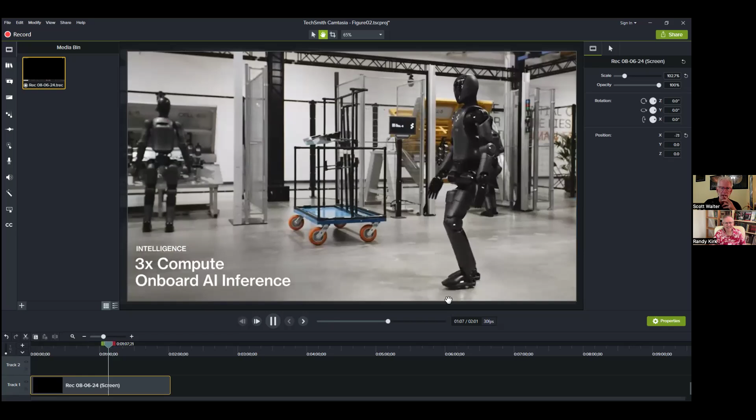But we're seeing a little bit more - we can see the camera suite that's in the back, and a funny kind of Cyclops head that's able to move with 2 degrees of freedom there, and also a change of shoulder design. This reveals some things we didn't see in the teaser video, but there's also a lot of other things in the teaser video not being shown here that we'll talk about. The first thing was like, okay, let's start counting robots, get an idea of how many are there. And when you're done, you end up counting 5.

So I guess the next time someone says a small fleet of robots, that's what they mean by that - means 5, I guess. I was trying to figure out what's a fleet, and the definition is anywhere greater than 1 up to 100 or something, like a naval fleet or a fleet of cars.

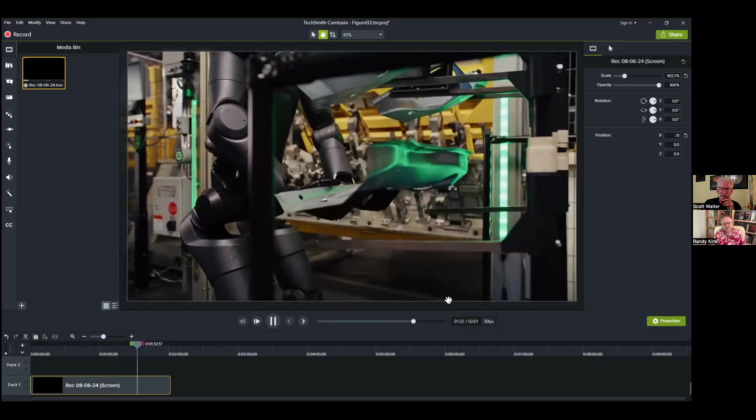And so here we see it actually in the production line, and I'll go through this in excruciating detail, but overall showing what I've always referred to as the low-hanging fruit in the automotive plants - there's plenty of example stations like this. Actually, up to this point, I'm very disappointed we haven't seen this from Tesla yet. We see them packing the batteries in, but I'm expecting them to show this because there's so many stations like this, and it is so easy. Aren't they showing that? It can be done, but there's still some aspects to it that will be a bit tricky.

Okay, so what were your thoughts at the beginning? Everyone says that the first 10, 20 seconds here is very similar, no doubt about it. Maybe it's just intentional to provoke a bit. But then as you start going around here, they're just giving you the view of the body and some of the changes that have been done. We can see that they really changed the hip area quite a bit.

So your primary actuator, the one that goes right through here, is the most important one - that's the one that gets you to walk. Now the question is whether they've spec'd it to have high enough torque to get the walking speed you want out of it. But I would definitely make that the primary actuator, and all the others would be a little bit later down the line. Now, we did get a breakdown in some of the quotes of some things that may not be obvious right here.

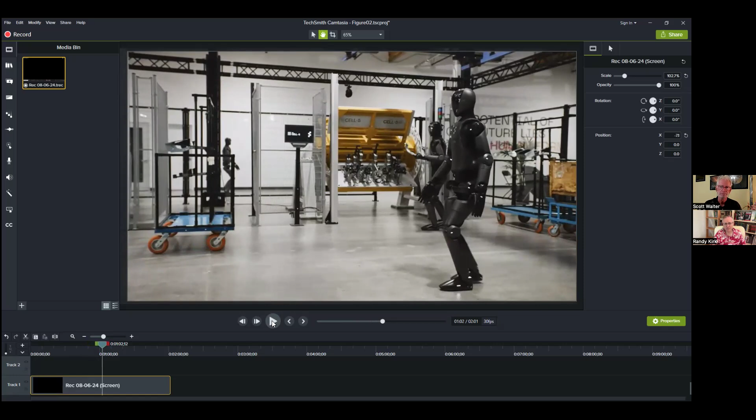But all right, what's going on here? What do you see, Randy? Well, everybody wants to see about the walk, how fast is it walking, how clever, does it look human-like, does it look steady, sturdy, does it look like it's confident? And to me, my first thought when I saw it, it looks like all the rest.

So I'd say one of the first things is it seems to be plodding, so it's not getting any heel to toe here. So it still seems a bit mechanical and stiff. It's a bit more upright than Figure One, but Figure One was very slow. This one is just slow.

Okay, so they may have doubled the speed, because I tried to do a calculation on Figure One, and it was really shuffling very slowly, maybe about half a mile an hour, a little bit faster, definitely under a mile per hour. This one is probably, counting steps and looking at the time, assuming anywhere from 10 inches to 12 inches per step—it's hard to estimate here—this is over a mile per hour. And it's about the same as what the Tesla bot's doing.

So the Tesla bot is also not fast. I've been pretty vocal on Twitter about this. I think they're both too slow for me, so they need the next version. Even the Gen 2 Tesla bot is very slow. It needs to double its speed. 1.3 miles per hour just will not cut it. You've got to be at least 2.6—that's the standard walking speed assumed for humans in the factory. And you can't get just another 30% boost, you've got to double it.

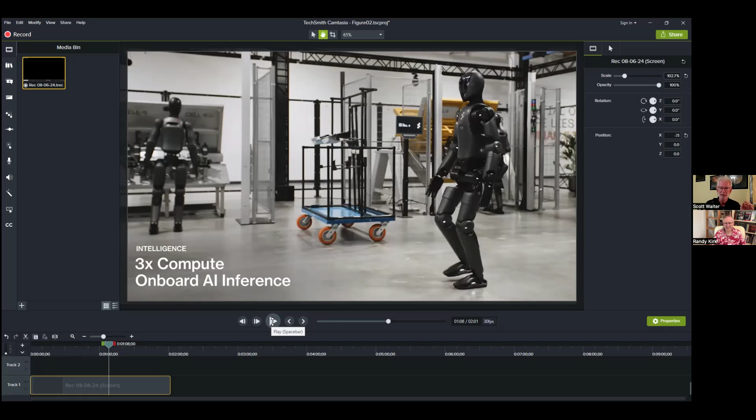Okay, so now do they have a pathway here to be able to double themselves? If you put this side by side, looking at the Tesla bot, it seems a lot smoother and a bit more graceful going through. You're seeing the heel to toe there, and over there you're seeing a little bit more in that. And so that might be one of the things they have to start working on themselves over time, depending upon how they do it.

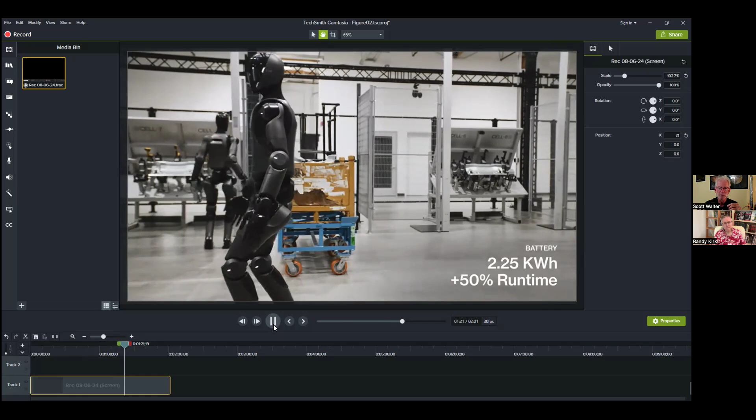One of the things we can see that their bot is doing that others have not done that well is it is walking backwards. That's very important to the actions going on here, because it needs to be able to step away, which is more effective. It's also able to turn a little bit faster now because they have the abduction motor, which makes the turns a little quicker. Still not really snappy, but a little bit better.

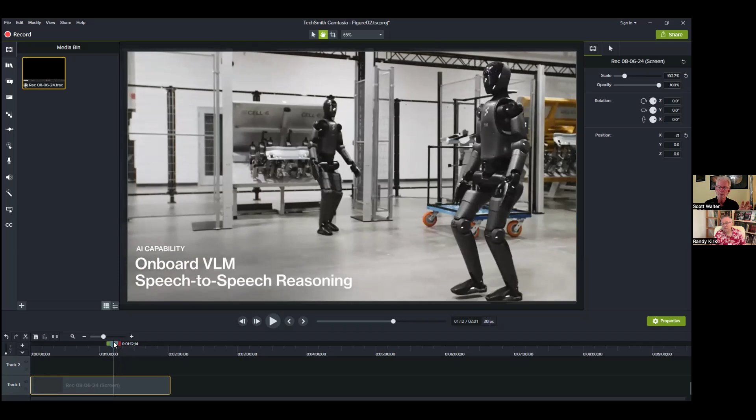If we go back for a second, the background here is that they've increased the amount of battery they have in there. This is down at the BMW in Spartanburg, in an area where they do a lot of prototyping, testing out new automation and new schemes to bring them in, doing runoffs and everything to make sure it's all right before installation.

So it's down there, and they're using the fixturing they were going to have on the floor, but everything else is missing, so it's not a real turntable. It doesn't have the full safety fencing in there. Obviously the robot's not back there. It doesn't look like they have the clamps, or the clamps may not be acting, because this is a training area—they're trying to get it ready.

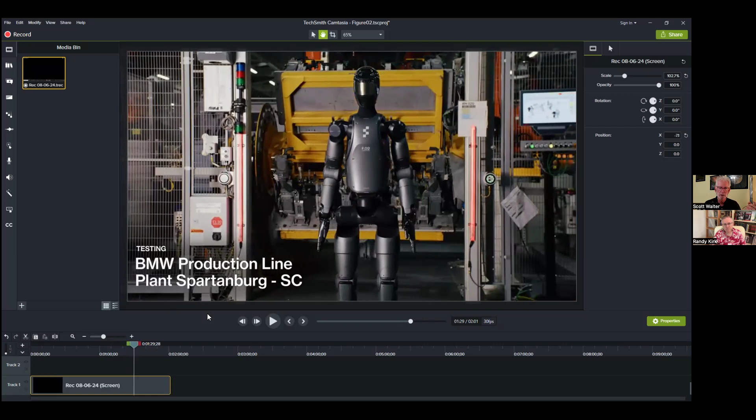And then they finally get to the point where they're ready to test it out actually in the production hall, so we can see the differences with what's going on here. It's got to pick up three different parts. One of the parts is big enough that you need two hands to do it—not because it's heavy, just because of its size.

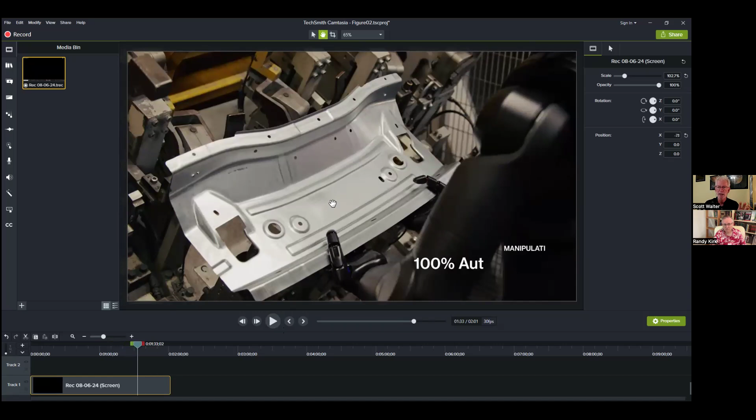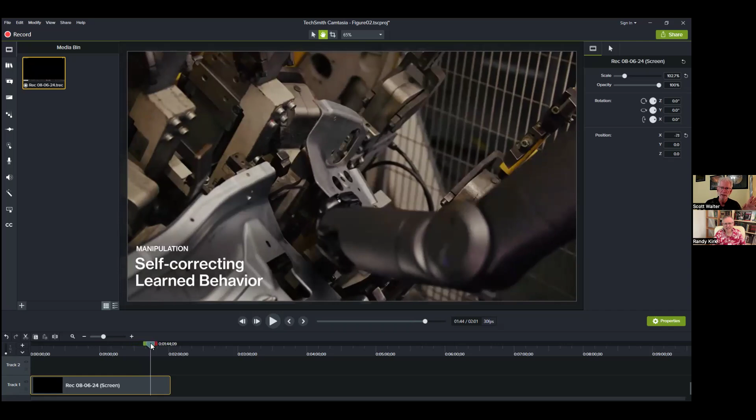The accuracy required for the placement here isn't very high. These stations are designed so it's very easy just to drop something in—all you have to do is get the orientation roughly right, and these tooling pins do the alignment for the final line. So all you have to do is get these two holes roughly over those pins, and it takes care of the rest—just drop it down. That's it. Then you get the other two pieces you've got to pick up, and those are easy enough to pick up with one hand.

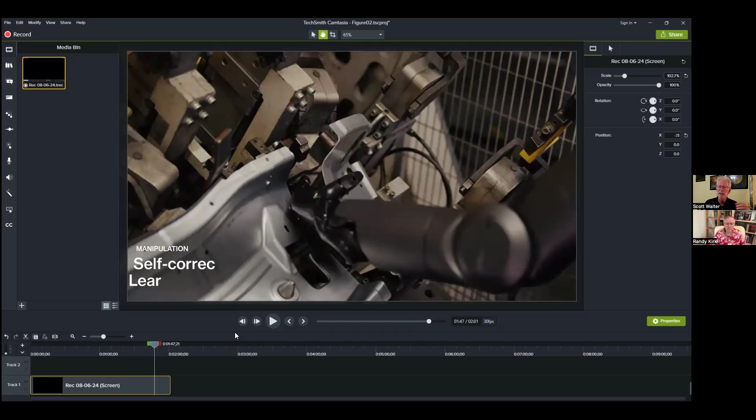Of course, sometimes when you drop it, it doesn't always drop down right, and it may be that your decision on where you pick that part up in the first place wasn't a good idea—maybe trying to drop it by coming around that side. Maybe it's smarter to pick it up over there instead. These are the things a skilled operator learns over time—what's the way that allows them to pick up a part and drop it in correctly each time. It's got the corrections in there, and then you've got to go ahead and do it on the other side.

Now, what's not being done in the prototyping lab is you see it needs to step back away. Once the light curtain is clear, they drop a physical barrier down, and then the clamps close inside there really quickly. That comes down and gets the final location of the part where it's supposed to be. Then the turntable spins, does a 180, and the robot's ready for that—so while you're loading this, the robot behind there is working on it.

That's the whole idea—you want this robot to not have to wait. During the probably 45 to 60 second cycle of that spot welding bot, this turntable is available, and that's how much time you have to load it and get out of the way before it flips around and continues doing it again and again. So you have the jigs and fixturing on both sides, and they just keep flipping around, and you want to make sure you're clear and everything else.

Now take a look at this dunnage here—this is typically where all the parts come in. They'll be in there, and you can see these things get beat up over time.

That's, you see all the dents and dings and everything else - that's what it's like being in a factory. And so this is the type of environment that these bots have to be designed to survive in.

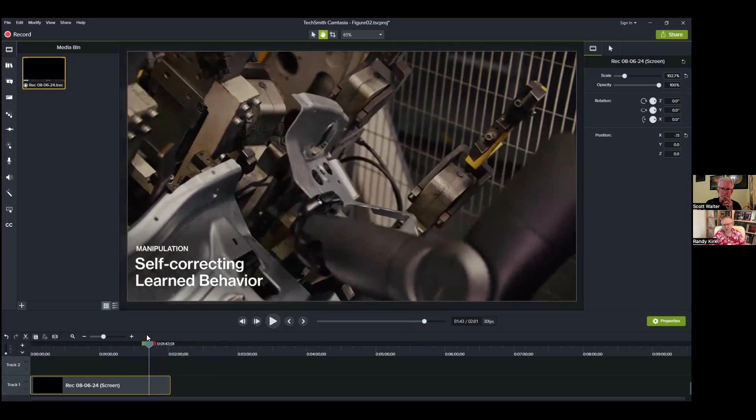So, okay, yeah. So back where he was actually loading, in both parts, in each case, it was dropped into place. And I thought that was, for as far along as we are in this process, for as far along as they think they are in this process, that still seemed awfully clumsy. It needs to get better.

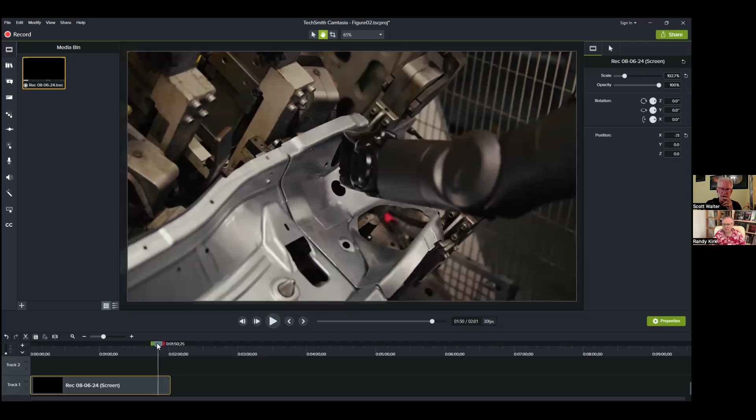Now, it could be that they just wanted to show the fact that it's able to self-correct when it got it wrong. We don't know whether it's just kind of dropping in really nicely otherwise. I think we've seen some other examples with Figure 1 where it was dropping in more cleanly the first time.

So you have, the cycle time on this is not super demanding. You have a certain amount of time to do it, so you can make these little mistakes and correct from them. And they're probably just able to get this within the cycle time. But the thing I want to point out here is we are not really seeing a pick and place operation - we're seeing a place operation.

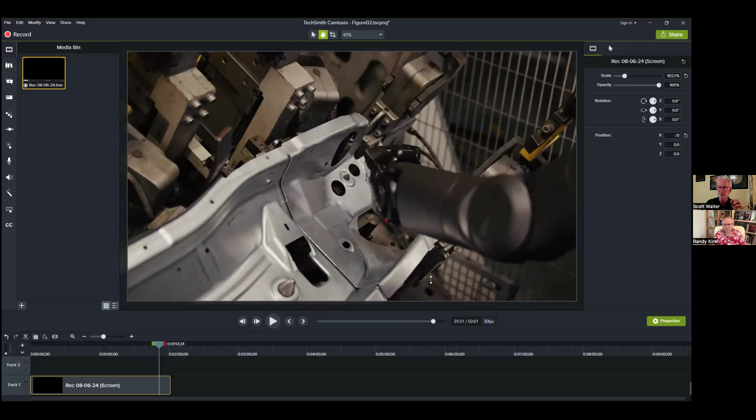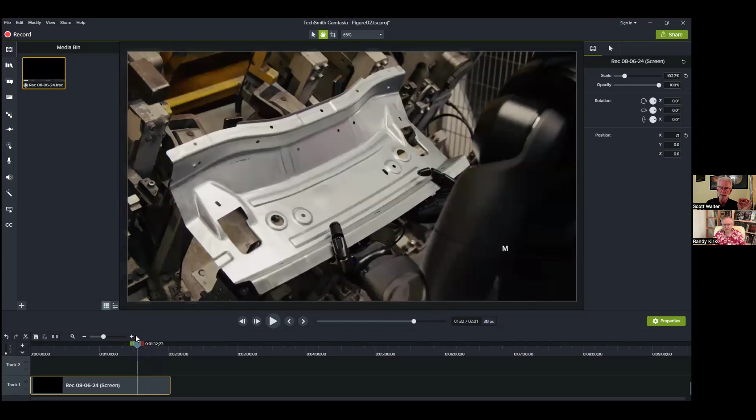Because the pick is artificial. And the reason it's artificial is look at where everything's getting picked up from right here. So you see this frame, it's got a single piece on it, and another two pieces presented very nicely and very easy. Where's the second and third and fourth and fifth? Where are the other ones coming from? I'll tell you where they're coming from - some human is pulling them out of a bin and bringing them over and dropping them here in place, so it can be picked up.

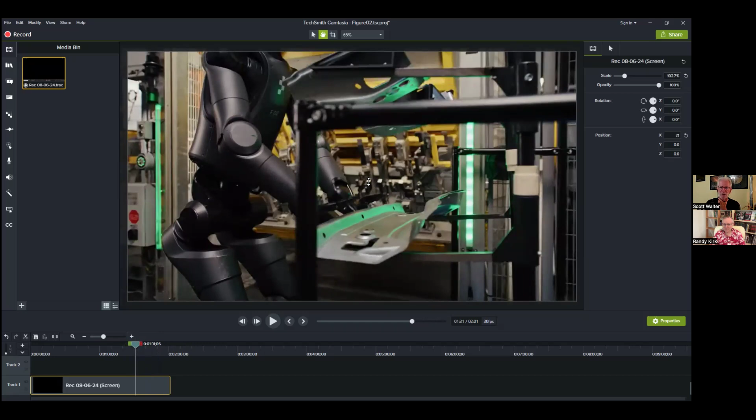So they're really working on that aspect of it, and not this part here - there's a lot to be gained and learned from it. But in the end, this is going to be tricky. And this could also be why we're not seeing Tesla doing the same thing, because this side of the operation is real low hanging fruit.

But this front side is a bit different. And what we want to see is this orange crate that you see here. This is the typical dunnage that all the parts arrive in.

And they're just kind of in there in a jumble. They're loosely organized, but not perfectly organized. There may be some that are a bit different. I think there was an image really showing them all messed up. So the robot is going to have to go down and in there.

And normally, of course, operators are wearing gloves that are very thick because that sheet metal is very sharp and you can get cut on it. So you've got to try to find the piece and get leverage on it to be able to pull the thing out and get it up and over. That's not an easy job.

Now, you know what it's like when you've got a stack of plates and you want to pick one up—you've got to get your finger in underneath and sometimes separate them, then you can get your leverage. If you get a bunch of these sheet metal parts nested together very closely, it may be like trying to separate a piece of paper. So that's where I see a lot of the tough parts, the effort, because these are going to be disorganized.

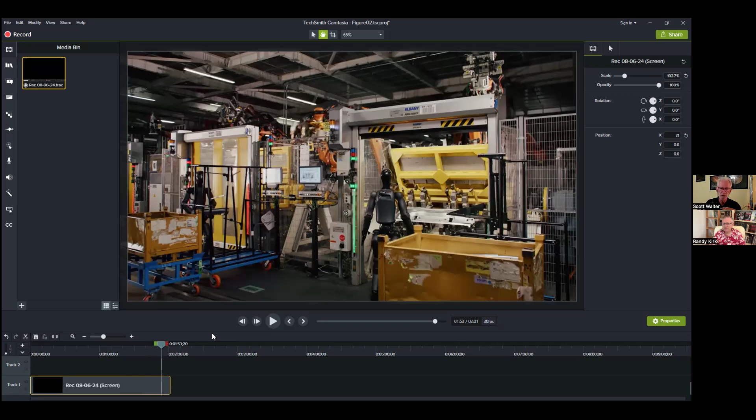You're going to have to go down there, identify the part that you want, go in and get that part and then pull it out. That's what's going to be interesting to see—whether they see that as being an issue or not.

And again, if we back up here, you're kind of looking at the dunnage, and it's telling you, oh yeah, you see all those parts in there. Because someone is coming over and pulling one out and then feeding in here for the next one, or in this case they're probably just recycling it because these parts don't go anywhere.

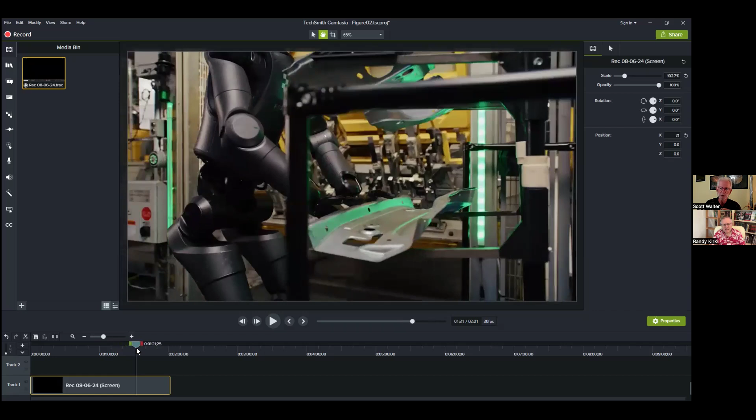Obviously on the real floor they go somewhere else. And on the real floor, this has been changed—I guarantee you that frame we're seeing out there on the production hall isn't there all the time. It's only there for this demonstration.

And more than likely you've got another one of these sections sitting right in there, and probably another one right over here because there's 3 parts. So each one of them has to be its own dunnage that you're pulling from. So that's out of the way, and that goes in there.

So as clumsy as all this is, as slow as all of it is, it's pretty darn sophisticated, given that they've only been at it for 18 months. But it's kind of like FSD on a car a year ago or 2 years ago—it makes some mistakes and does things slowly, or doesn't do it the way we'd like it to.

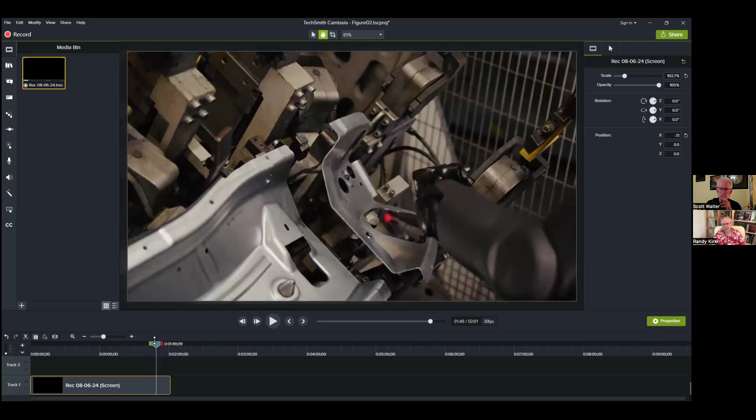But it was such a proof of concept that you just sit here and watch this and think, well, yeah, I could employ that in a factory right now. I can think of jobs it could do right now in my own factory. It might be slow, but okay, it's free. I mean, it seems to be okay.

And again, we can see that with these sharp metal parts, you've got the hand coming in here. The hand does seem to be pretty robust. They've added a lot of padding and everything else on there, but it's going to be interesting to see what it's like after doing a real full shift for a week or something like that.

It's like, whoa, is it going to be able to make it to the end of the month, are these detachable pads? Or would you be considering actually having some sort of cover for these things, so the robots would have some form of PPE of their own to protect them from what could be—and these things are also going to be a little bit oily.

You've also got that to kind of deal with—not just that it's sharp, but also something which has fluids on there that you don't want to get all over your bot.

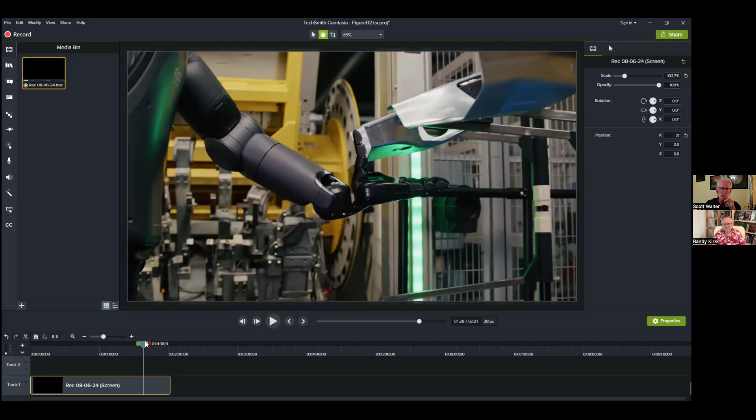So those are going to be some of the challenges, and I'm wondering if there's also similar challenges, because to me this has been the low hanging fruit all along. That was very clear in the records, like, this is it. And Elon even said they talked about loading that—that's why I'm disappointed just to see, you're only doing the batteries right now.

Over here you get that S/X line, which is idle most of the time. It's running one shift, and stuff like that. And it's got way more of these stations than the others, because the others are using gigacasting. But the S/X still has that whole underbody assembly, with all those parts that have to be spot welded.

And once you get that, that's why Elon can make kind of that statement of like, we'll have about 1,000 next year in our factory. And there's a good chance that a lot of them might just be on the S/X line, because that is such low hanging fruit. And it's the perfect prototyping area.

So what if production goes down a little bit for that week? It's not like they have the demand for it, so they don't have to worry about it as much. And they might actually get the demand to go up if they can say it's bodied by Optimus.

It's the thing about, there would be a lot of people that are buying the Foundation series of Cybertruck. I think a lot would buy the S/X if it had the Optimus brand on it, because that would be like the first cars where you could really say Optimus was involved in building it.

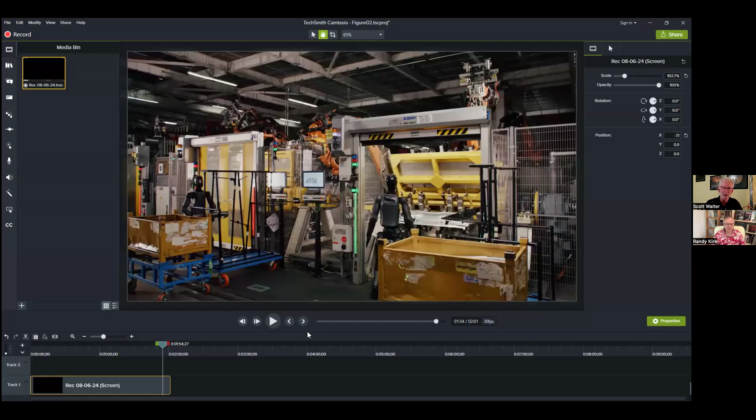Okay, so if we go right back here to the cameras that they have - I think we see it right about here. So we can see there's one camera right in the middle, and maybe I can show that off a little bit better. Then right down here you'll see there's a small camera there and a small camera there, and that creates kind of a nice triangular area where this one is fixed and stable and you have that one that's moving around. So from this they may be able to get a pretty good idea of where they are as far as location, and because the head's able to move around, they're able to see as much as possible.

So the Tesla bot, at least in the patents - we don't know what's actually in there - we think they have 2 on the side, very much like on the car. So it looks like 3 in front, 1 on the side and 1 on the side. This is different than what just about everyone else is using - they're all having 3 up there. When you look at the Sanctuary bot, Phoenix, it's the same way, you have 3 there. And then what's kind of surprising is in the rear, because we just think all you need is 1 camera in the rear - like our Teslas, we just have 1 in the back, it's a wide field and that's it, because you basically don't drive backwards that much.

But when we look here, somewhere right there, these are the cameras in the back - there's 3 of them. Wow, so there's a certain importance to being able to have that. And now this is looking down and not up, so I've mentioned that basically it exposes itself to attack from raptors - a big hawk or something like that can come down because it won't be looking up. As long as its head is forward, that's where its visibility is.